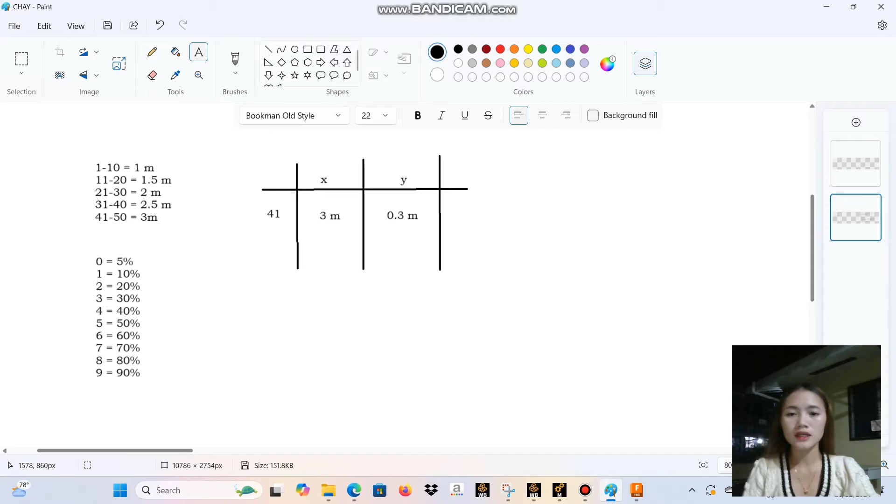But before that, I will compute the measurements to use for the object. Since my attendance number is 41, it falls under 41 to 50, so x is equal to 3 meters. For y, since 41, with 1 equal to 10%, so 3 meters multiplied by 10%, therefore y is equal to 0.3 meters.

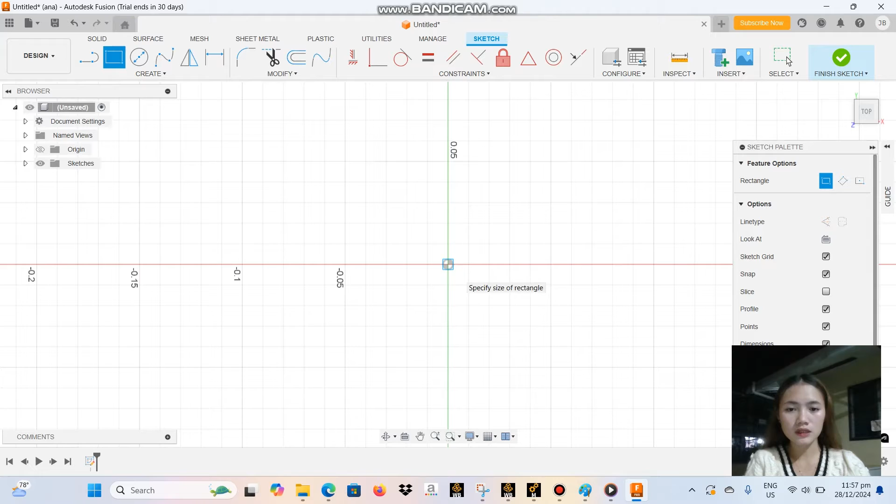Next, let's go to Fusion and create the object. First, click Create Sketch, then click here. Next, click the 2-point rectangle at the origin. The measurement is 1 meter tab, and our y is 0.3 meter.

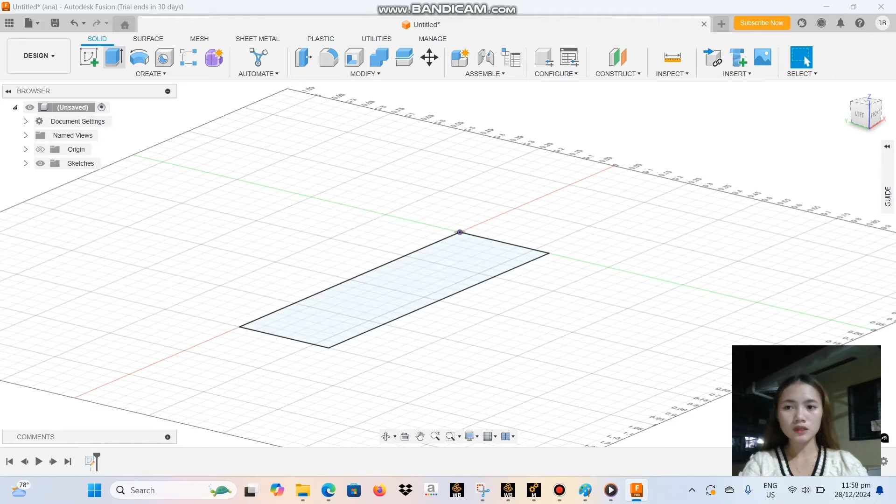After that, click Finish Sketch. Then use orbit to inspect the object. Then escape, and click Extrude, going up to 1 meter.

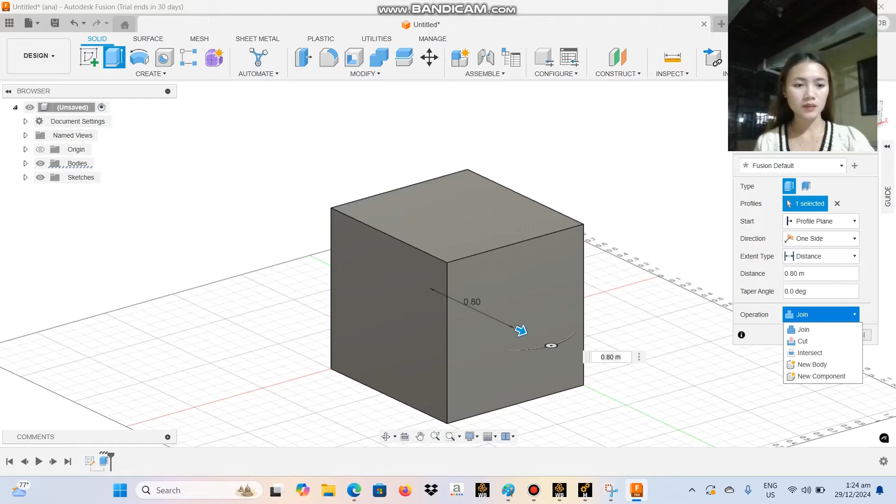And this face, we extrude to 1 meter. But before that, we change the operation to new body so it doesn't merge. And its measurement is 3 meters minus 0.3, which is 2.7 meters.

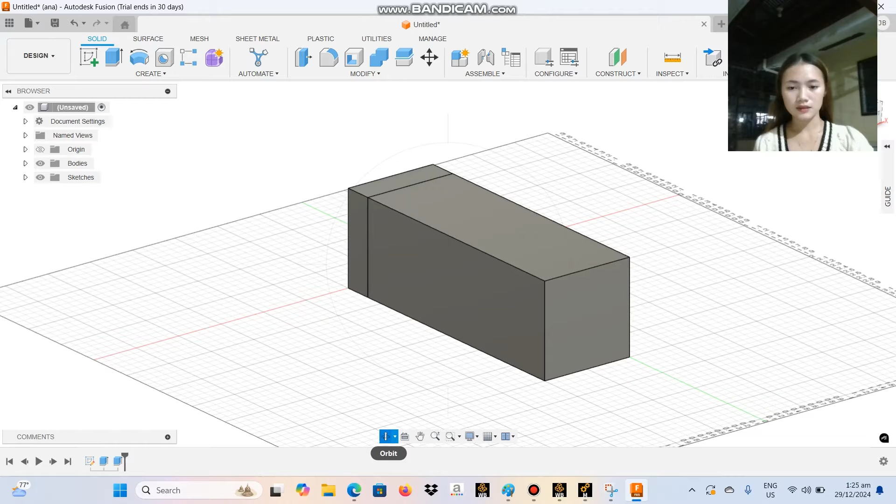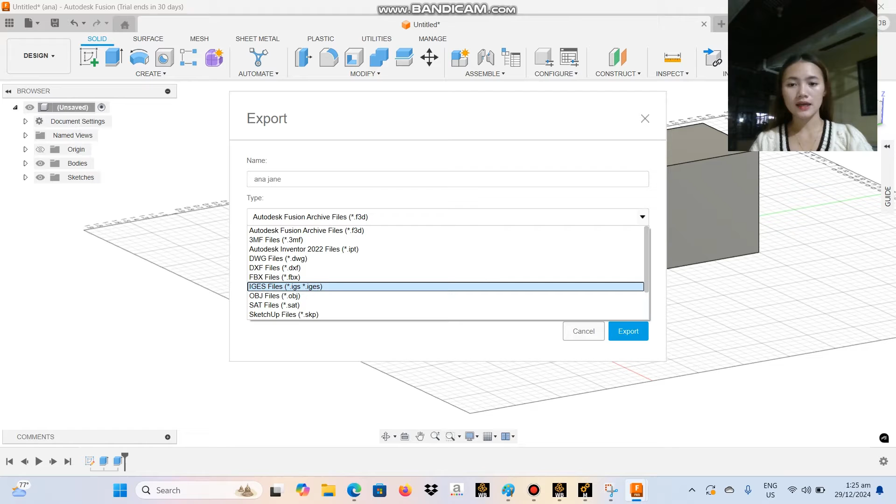Name is Ana Jane, and for the type, it should be .igs or .iges. Then export.

After exporting this object, let's go to Workbench. Here in Analysis Systems, click Steady State Thermal.

Since the engineering data is already checked, we won't touch it. Right-click on Geometry, then click Import Geometry, then Browse. And the file we saved earlier is anajane.iges. Open.

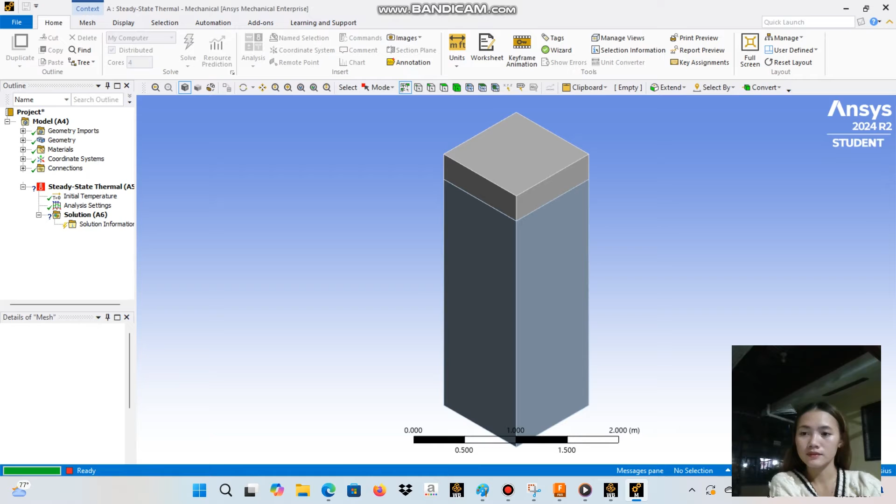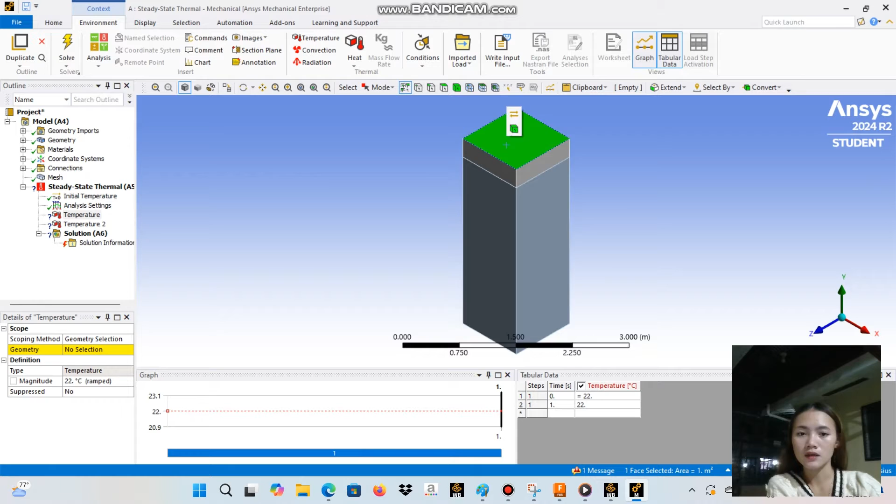Next is Steady State Thermal. Click Environment, then Temperature twice. For the first temperature, the first face we change to 500. Then select now, apply.

And then the second face is changed to 25. Select none, click apply.

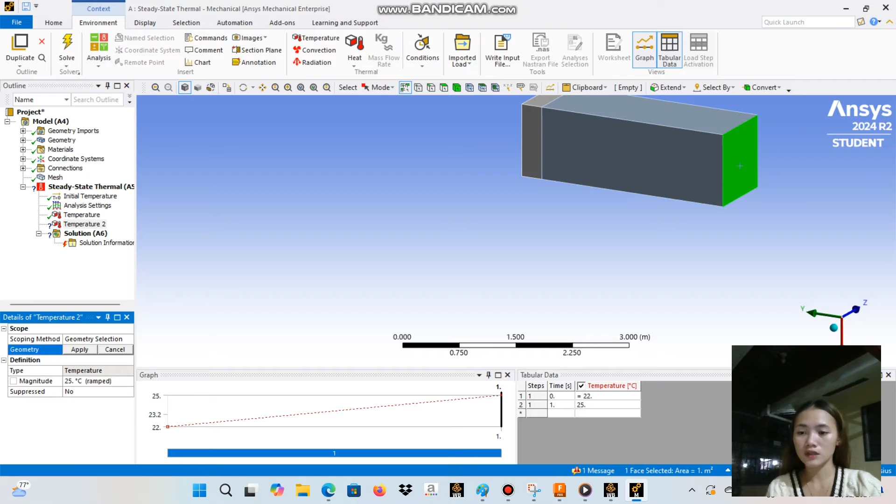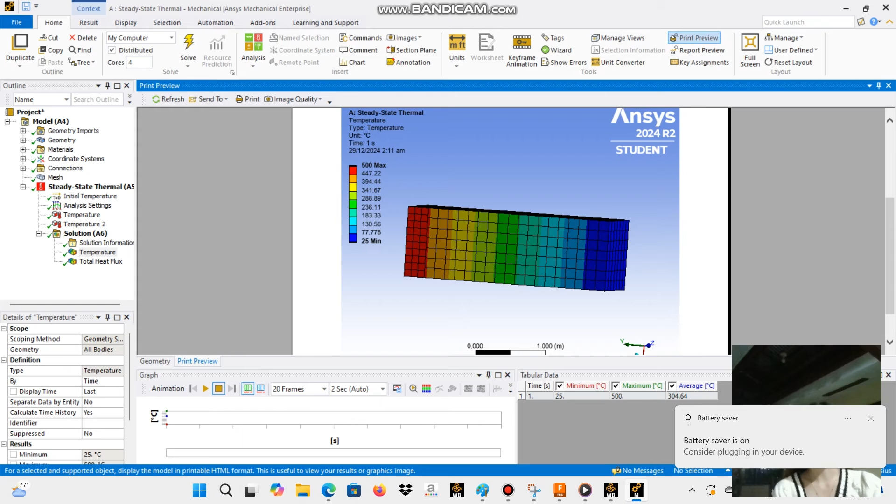After that, click Temperature, then print preview. Let's fix the display. Then home, print preview. This is for the temperature.

Subject is heat transfer. Author is Ana Jane L. Ramos. Prepared for Engineer Jeremie C. Balang. Then click print.

Then Microsoft Print to PDF, click print. Enter the file name: Ramos, Ana Jane, L. Temperature.

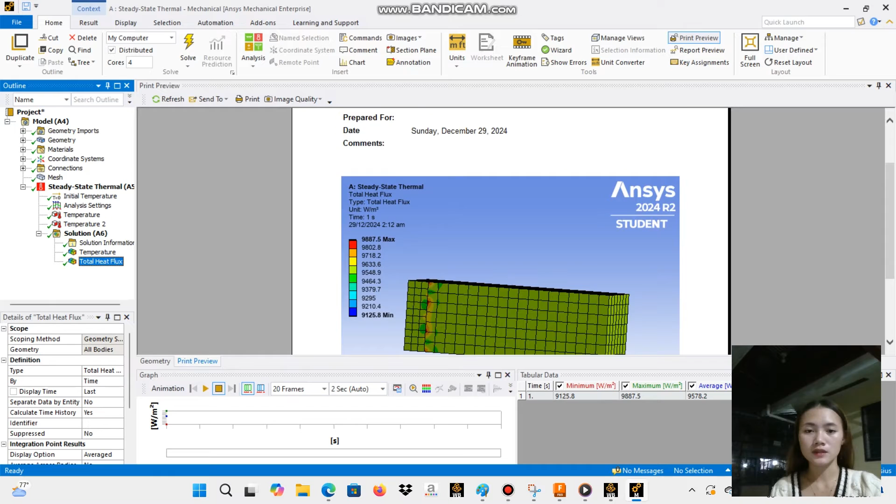Save. Next is the total heat flux. Heat flux. Subject: heat transfer. Author: Ana Jane L. Ramos.

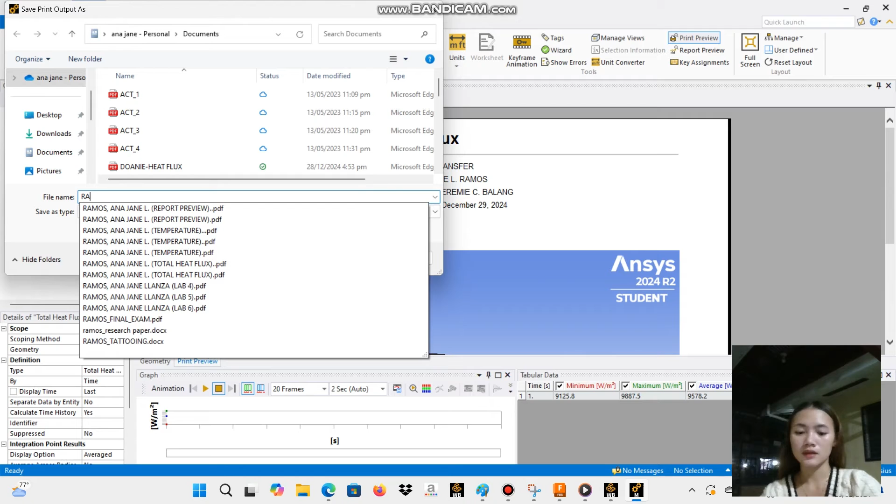Prepared for Engineer Jeremie C. Balang. Then click print. Then the file name: Ramos, Ana Jane L, Total heat flux.

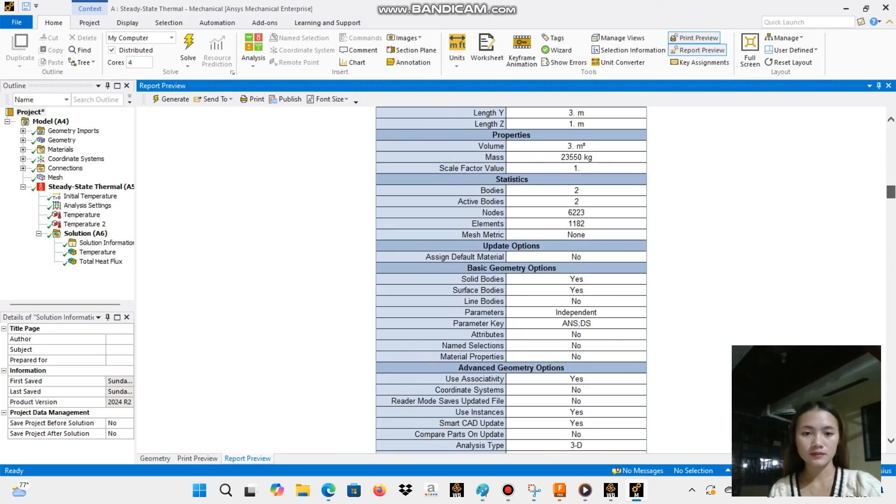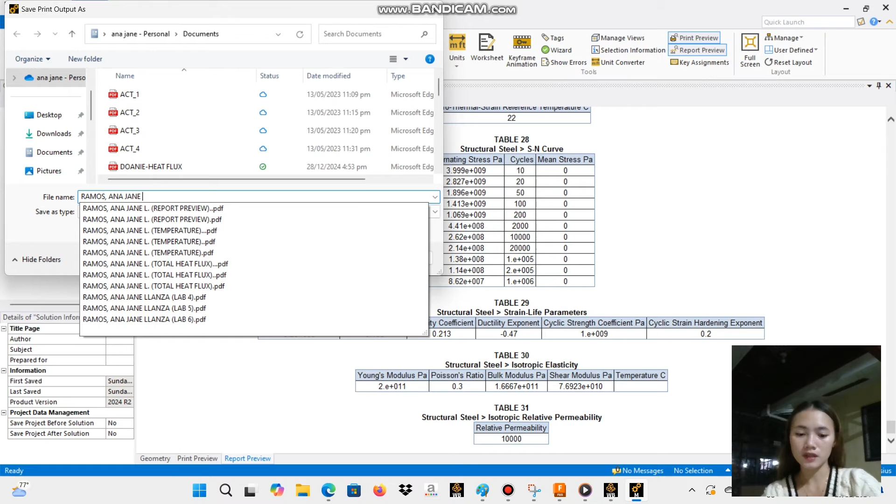Save. And then the report preview. Then click print. Then the file name: Ramos, Ana Jane L, Report preview. And save.

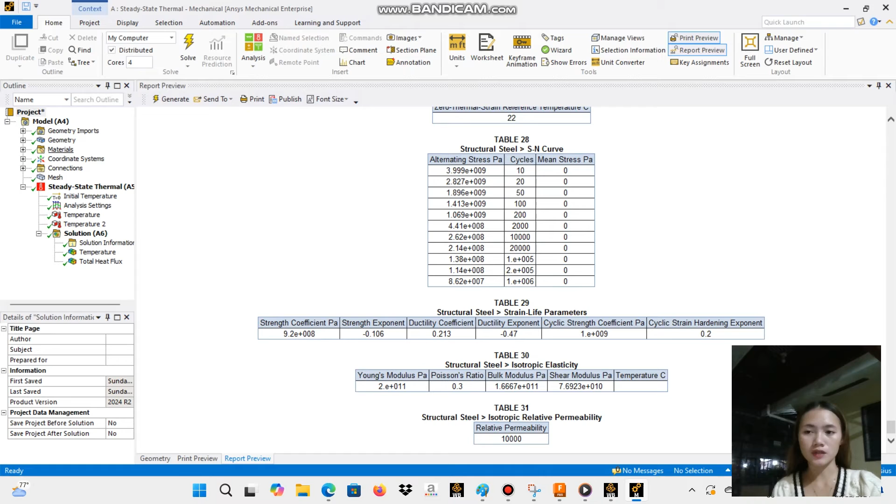Next I will show you the computation of total heat flux and temperature. Click materials, structural steel, and the isotropic thermal conductivity is equal to 60.5 watts per meter degree Celsius.

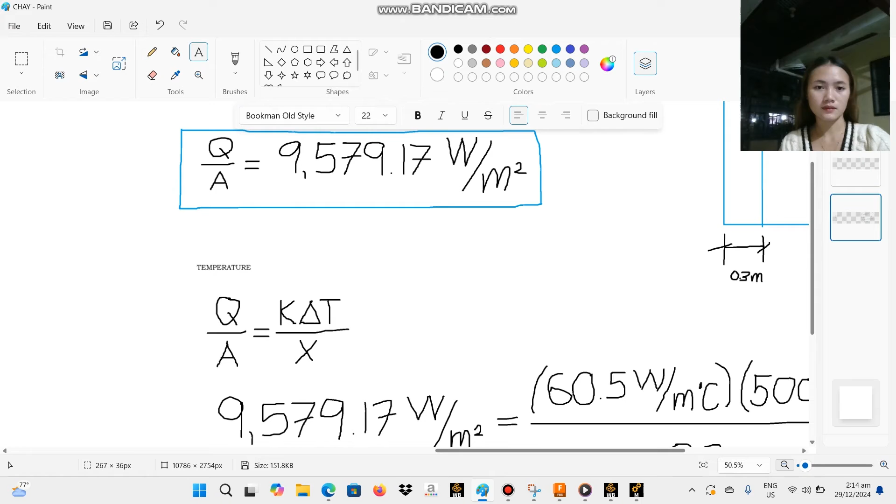For total heat flux, we have the formula Q over A equals K times delta T over X. The value of K is 60.5 watts per meter degree Celsius, times delta T which is 500 degrees Celsius minus 25 degrees Celsius, all over X which is 3 meters. This is it, the total length is 3 meters.

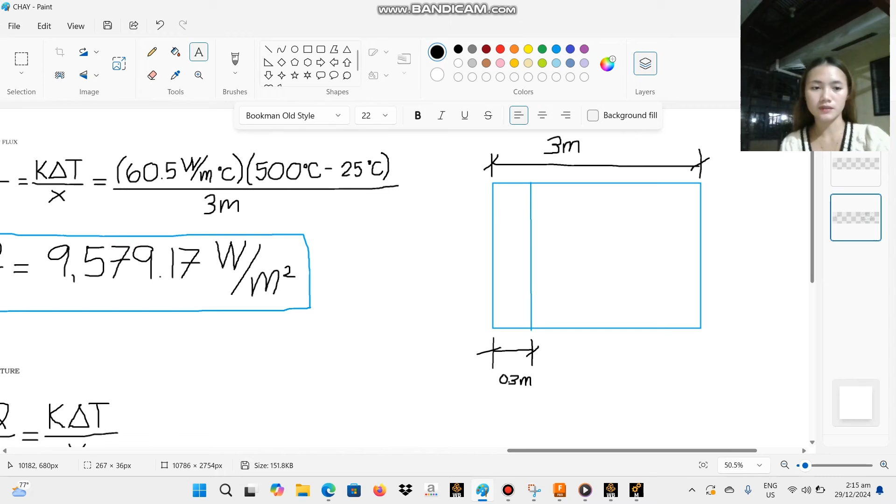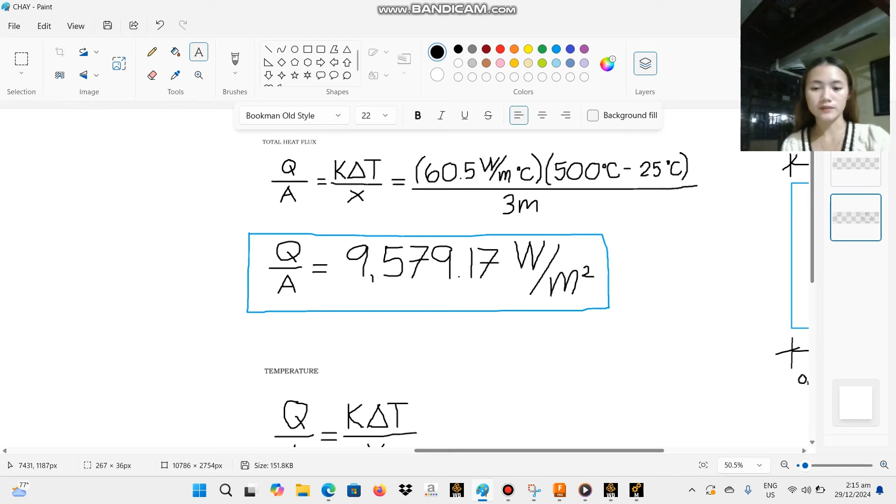So when we solve this, the total heat flux equals 9,579.17 watts per meter squared. So let's check this in the model.

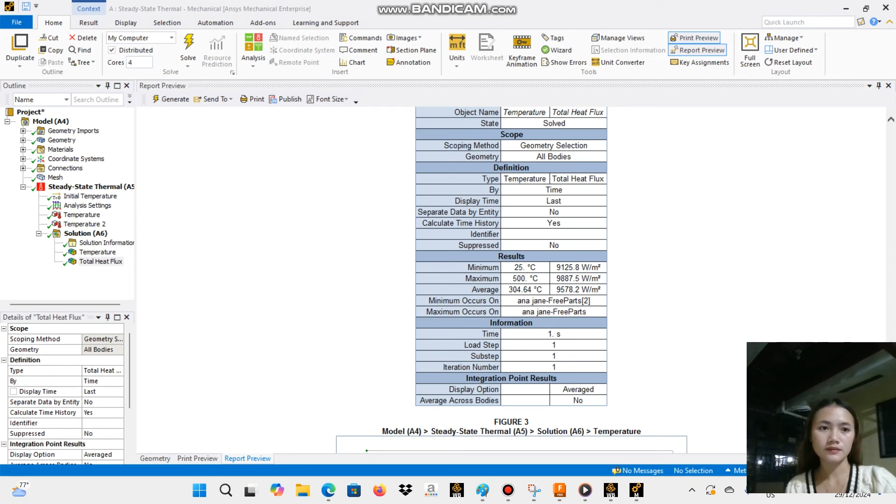Total heat flux. Here's the average: 9,578.2.

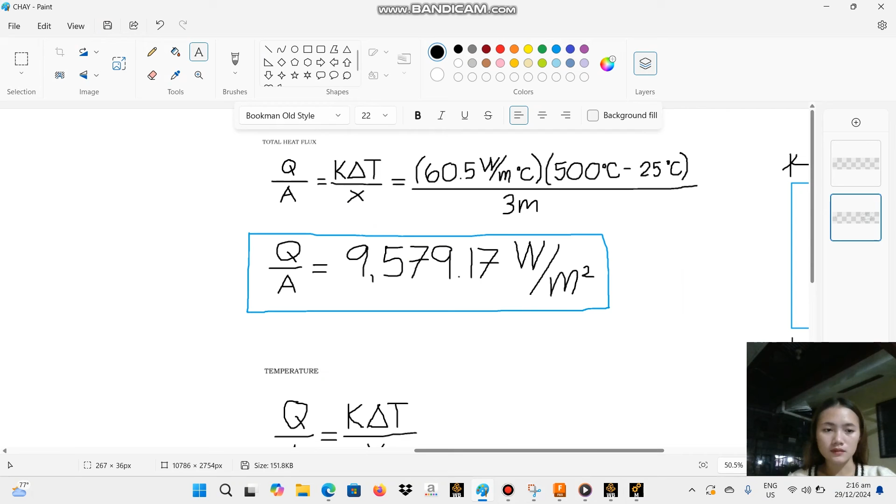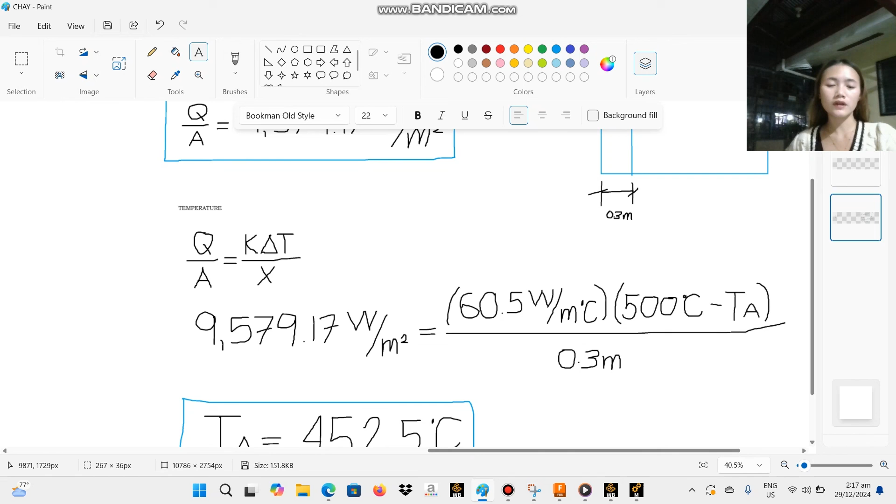And for the temperature: the formula is Q over A equals K times delta T over X. Q over A is 9,579.17 watts per meter squared, equals K which is 60.5 watts per meter degrees Celsius, times 500 degrees Celsius minus TA, all over X which is 0.3. Therefore, TA equals 452.5 degrees Celsius.

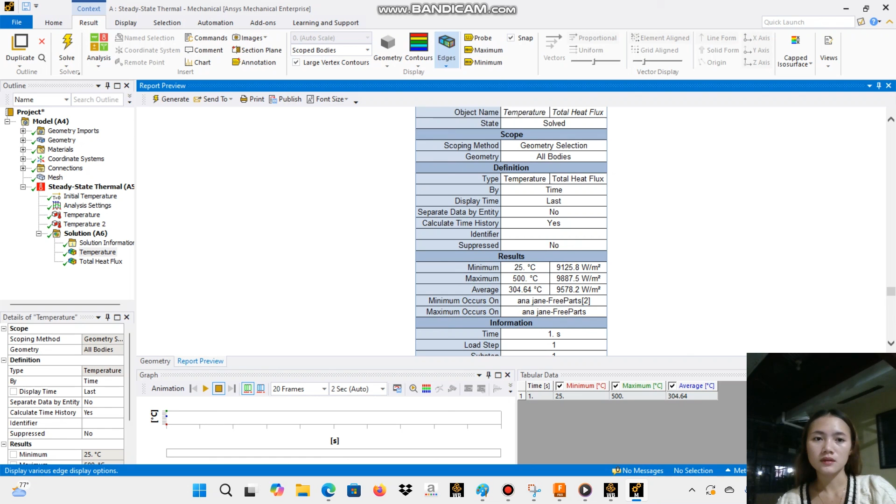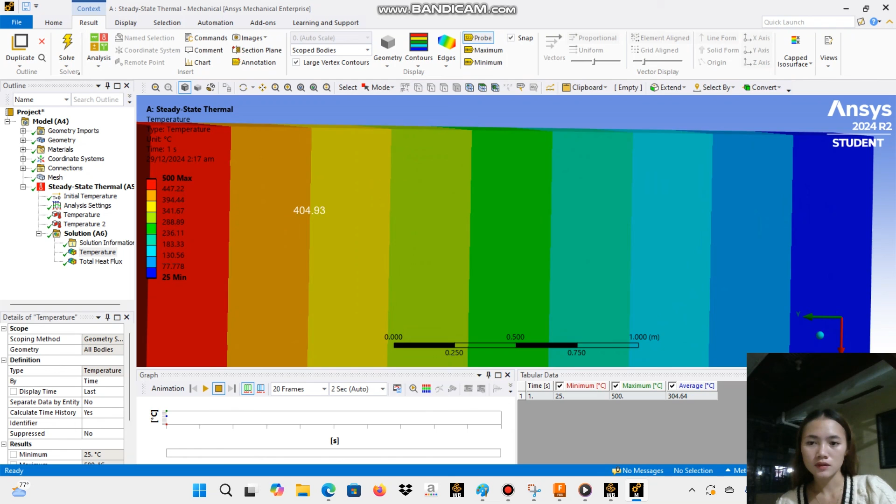There in home, result, edges, and probe. And then here: 452, 452.50, 452.56.